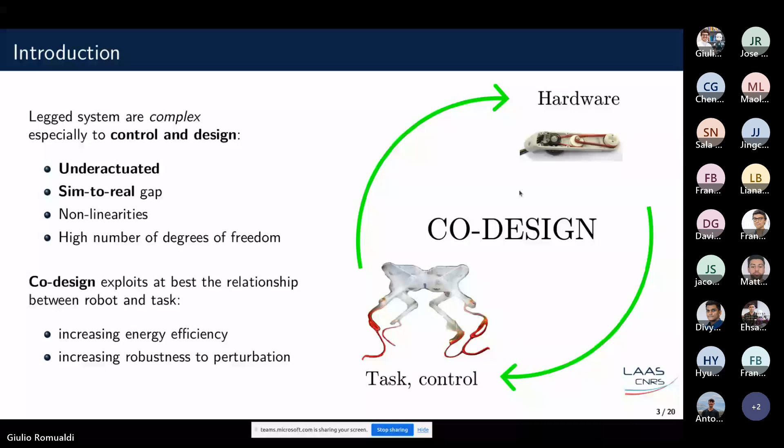What we see often in robots is that there are some waves of implementations that implement good designs. For instance, in the case of humanoids, we see that successful robots like Digit and Atlas have dynamics that allow for simple control. Digit is pretty close to a linear inverted pendulum model, presenting some other complexity, but more or less it's easy to stabilize with simplified models. Also in the case of Atlas, simple models work pretty well.

There are also some other trends pretty interesting in the frame of quadrupeds that have been developed and used extensively, coming from MIT Cheetah, showing how the proprioceptive design of the actuators simplifies control for achieving locomotion. This was first implemented with successful quadrupeds from MIT, from the work done by Kim and Patrick Wensing, and then has been ported to a lot of different platforms, one of which is Solo, which is the robot we have been working on and my research stemmed from.

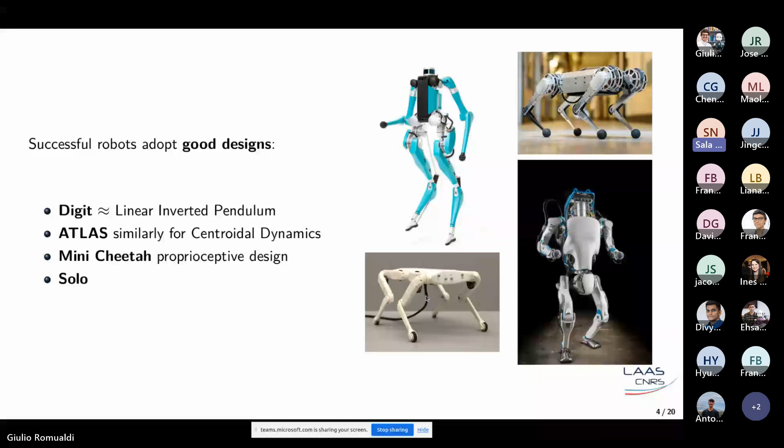So we see this pattern, which favors lightweight systems with concentrated inertia or high power density actuators.

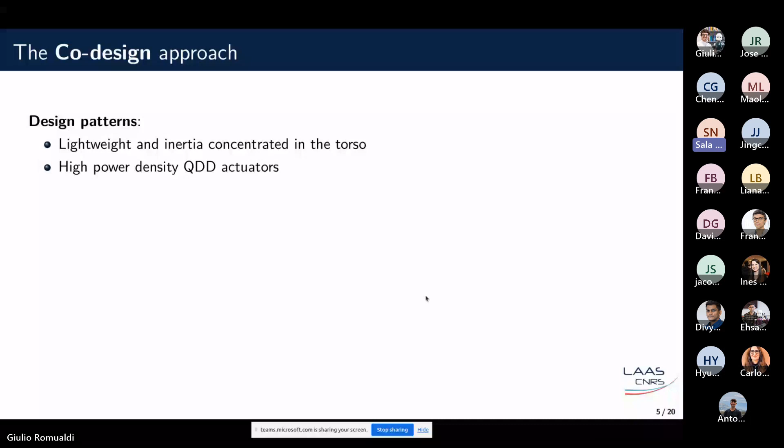But we also know that from the engineering point of view, the selection problem is very complicated because the design decision space has a lot of possible choices, even if you have to select some motors from off-the-shelf catalogs. There's a problem with complexity that is combinatorial, and moreover it's difficult to predict what the impact of the choice will be on the final design.

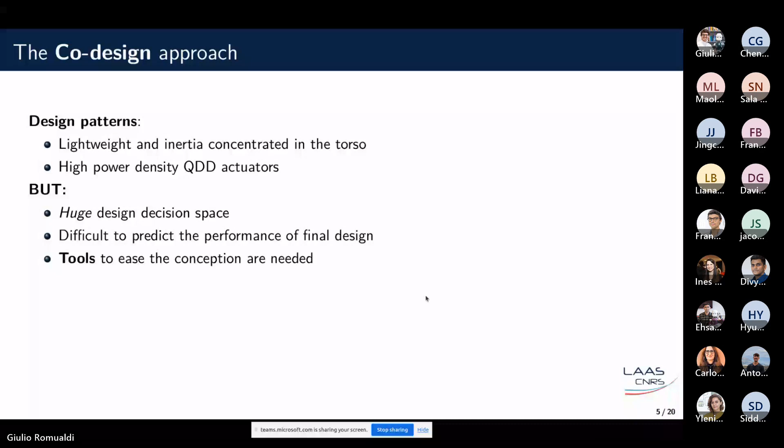So what we've been trying to work on is some tools or methods that can ease this conception and designing phase, that can be used maybe by system designers or roboticists. So we have some high-level idea about the task that a platform should do, but we really want to be sure that it will be the best version that can be deployed.

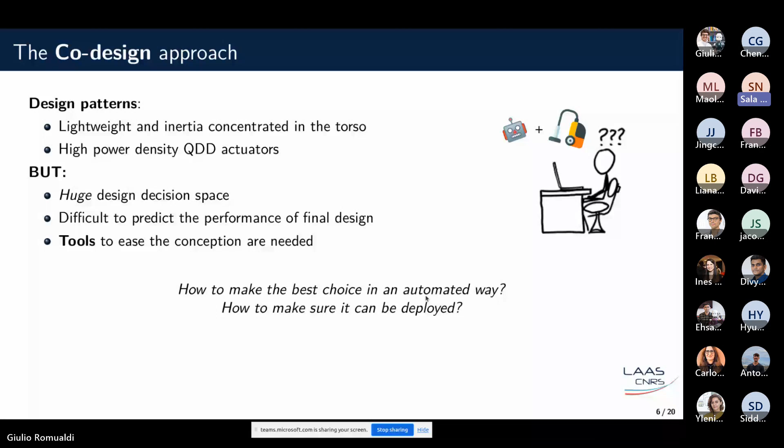And we can do this by using some nominal design, so what I would call a good idea, and then by exploiting some technologies that are already there: design, optimization, and simulation. These are workhorses for roboticists. This process has to be integrated in the same kind of framework.

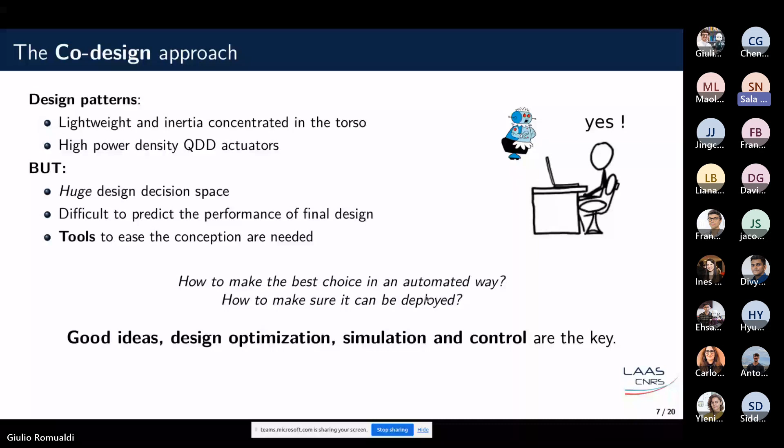Codesign by itself presents a pretty complex problem in which we are trying to minimize something, and the main way that we write this kind of problem, especially for robotic systems, is through an optimal control problem in which we specify some evolution, some dynamics, some high-level constraints on actuators, control, and state of the robot, and we try to minimize some metrics.

This problem of minimizing at the same time state, control, and design parameters, which I've been calling with this letter D, becomes a classical OCP problem in which we're just trying to optimize state and control once we fix some instance of design, so when the design related parameters are fixed.

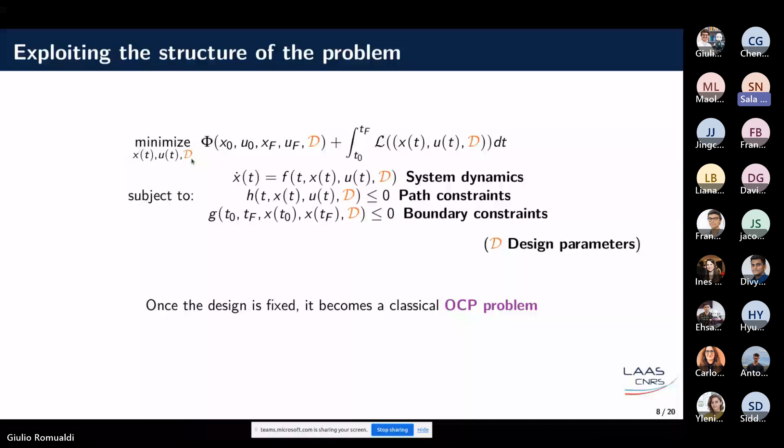By using this idea, what we've been exploiting is a bi-level approach in which there is an exploration phase for the design parameters and an optimization phase for the trajectory. With this in mind, the problem, which was pretty involved and required some specialized technique, can be solved with standard tools. It's automatically split into two parts.

One part mostly takes care of selection of the hardware, so the parameters that have been called design parameters, and the following task, which is just trying to optimize a given formulation that we have been proposing.

We're using two loops: what we call the outer loop, that is selecting the hardware through a genetic algorithm, and the inner loop, which is just minimizing the trajectories for a given robot model that is being drawn out of a population of initialized designs.

For each individual of this population from the genetic algorithm, after the trajectory optimization is done, we have as output the optimal trajectories and also the minimized cost, which in our case is mostly related to energy consumption. With this information, we can feed back the minimized cost to the genetic algorithm, and then the genetic algorithm can understand in a way what designs are performing better for the given task.

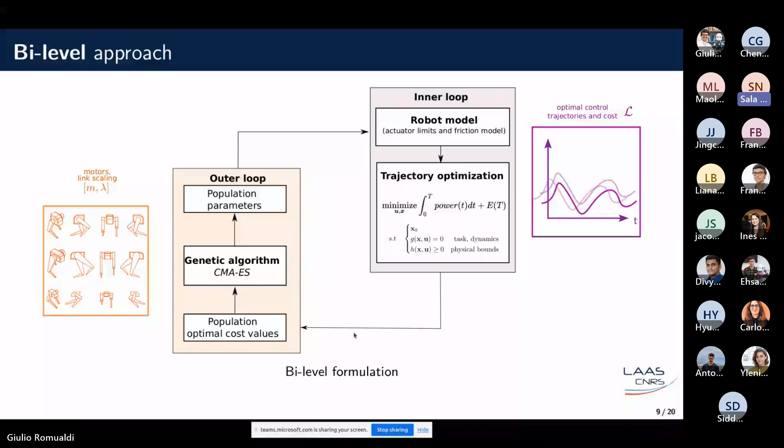So in this work, we've been working on open hardware from the Open Dynamic Robotic Initiative for a considerable amount of research. This is a project that has been carried on at NYU and Max Planck under Felix Grimminger and Ludovic Righetti.

The idea was to develop hardware of completely known characteristics for the researcher, so that the actuators and the characteristics of the structure are known.

Moreover, the idea is that the actuator blocks can easily be purposed for different robot topologies. Here I'm presenting the quadruped version of Solo, and the biped version that is called Bolt. But also some other variants are there, like it's possible to build some manipulator systems with the robots.

And the core of the work was to understand, since we have this accessible system that is pretty versatile in design and can be purposed freely, how to use the same hardware technology, same motor types, which in this case is from the drones, to make the robot more useful. So to understand how the scale of the robot was impacting the performance of the system, taking into account power efficiency. This was particularly important to have a model that estimates the consumption.

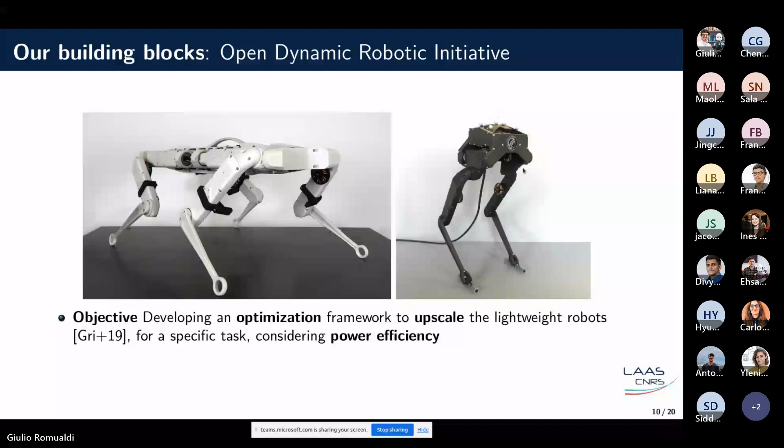So one main part of the work was to understand the actuator model, identify it, and determine how it's being modified by the selection of the motor and the transmission system. Here you see the open actuator model that is in Solo and some other robots. As you may see, it is simple. And the main idea that we had was to understand how the Coulomb friction coefficients are being modified by the selection of the motors and the transmission.

So in a first part, we worked on this side. Then another part that is related to the hardware is about the structural scaling, and there are a lot of different ways to modify the scale of a robot. What we suggested initially was to keep the material the same and also the same structure, but to tie the section scaling to the length, so that we can keep some kind of structural rigidity. It is important to have a structure that...

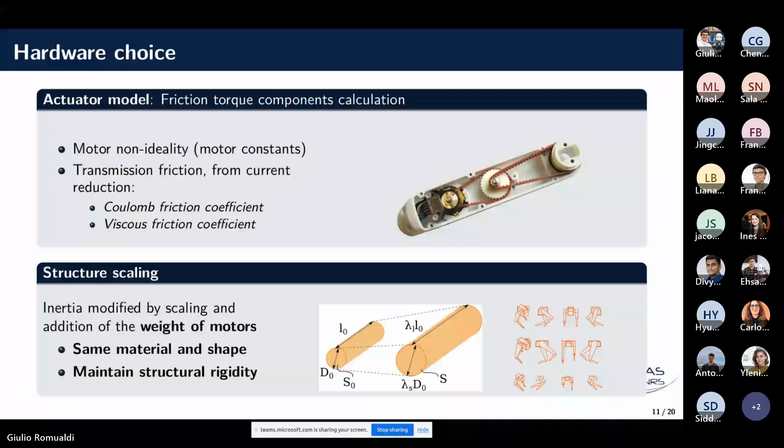...which may be problematic in the case of technologies like this, in terms of what concerns the energy efficiency. Once we found out how all the parameters related to friction were determined, and for the OCP, the main idea was that some kind of interaction with the environment, given basically by frictionless dynamics, we can reconstruct the power that the motor is acquiring, because this will also be related to the losses that we have in the transmission.

Basically, for producing this interaction torque at the joint level, knowing the transmission properties, we can reconstruct the total motor torque, including the friction component that is added. And with this idea, we can also understand how much torque and power is being lost at the joint level, and how much is being lost in the transmission as well, from an electromechanical point of view from the motor's point.

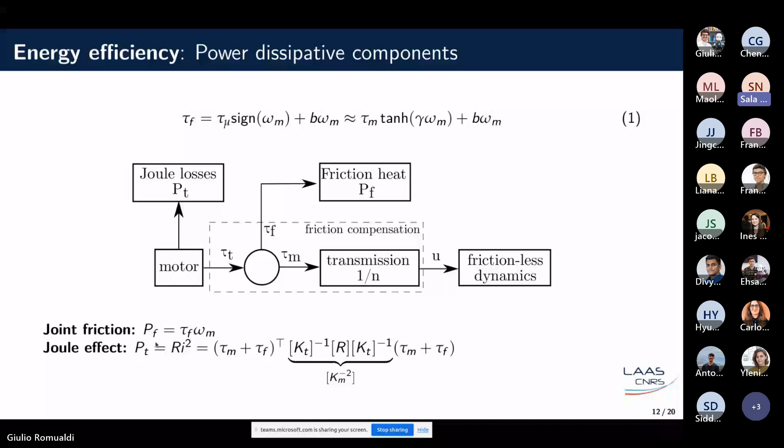So in terms of the overall variables I've been presenting, there is this size variable that is modifying the model inertia and length. In particular, we've been using Pinocchio for parts, so size is really impacting the robot model that is being fed into the OCP.

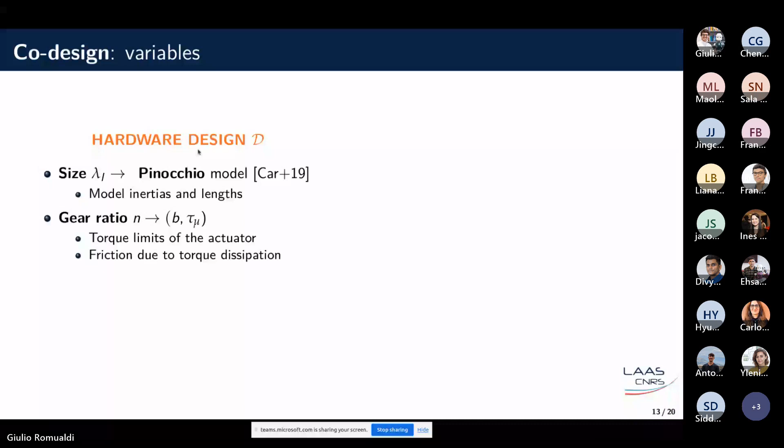Then another variable is related to the gear ratio. This is another variable from which we estimate the characteristics, the losses in identification of the actuator, so damping. This also impacts the torque limits of the actuator. So if we fix a motor and a given gear ratio, we also have a maximum joint torque that we can apply, and this is important to account for the limits of the OCP.

And then here it's related to another variable that is mainly related to the motor choice. Initially, since we knew all the information about the motors that are used, we made a simple regression from the set of motors we use that was enough to identify most of the properties of interest to us. That means the rotor inertia, the stall torque the motor can provide, the maximum angular velocity of the motor, and the motor constant for the Joule dissipation.

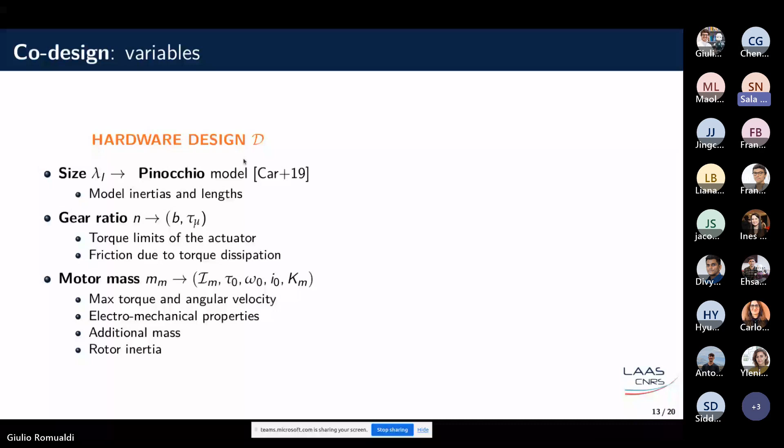From the control point of view, we've been focusing on optimal trajectories, so state and control, and we try to minimize the cost function. Additionally, other than the optimal trajectories, we've also been optimizing for robustness, using some controller-related parameter that allows us to scale up the Riccati gains from the DDP.

For the trajectory optimization with DDP, we use Crocoddyl, and one of the outputs of DDP is the optimal trajectory plus some gains that allow us to correct locally the trajectory with respect to a state perturbation.

So with this idea, if we have the optimal control U star and the state X star, and we want to follow the trajectory, with respect to the actual state and the state that we plan to be, we can utilize this simple linear feedback to stabilize the plan.

So the idea was to optimize with a scaling factor some variables related to the Riccati gains. It's still the greatest part done by the Riccati gains, but it's possible to add variables in the controller design.

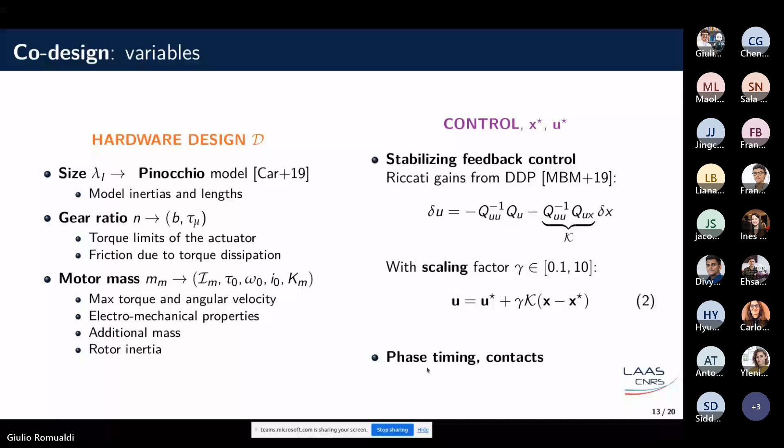In this optimization, we've been working on different kinds of hardware. In particular, some goals were first shown for a simplified version of the leg system, which is actually a leg that has an under-actuated base that can slide. This is a simple test bed that allows us to understand the effect of the contact dynamics and the energy efficiency of the actuator.

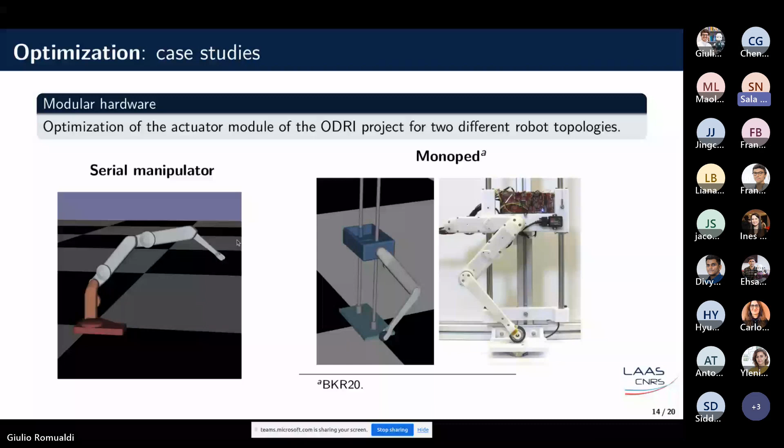Then for robustness, also some work was done for a serial manipulator with a similar structure. Then recently, we've also been working on a quadruped in collaboration with DFKI. And the quadruped itself was made using mjbots open-source platform.

The idea was to understand how, also in this case, the link shape, the link scaling, and selection of the motor is impacting the performance. And in this work, a major focus was on periodic tasks.

This motivated us to change also the optimization framework at a lower level, because in the previous version it was not possible to include high-level constraints from the initial state, which is important in the case of periodic tasks in which we want maybe just to translate forward by a given delta, with all of the other variables equal to the initial.

And from this, I can maybe show you. We were able to validate the power cost function model with this prototype implementation. That was also quite interesting, and it identified the model for the losses and how close those losses were to reality.

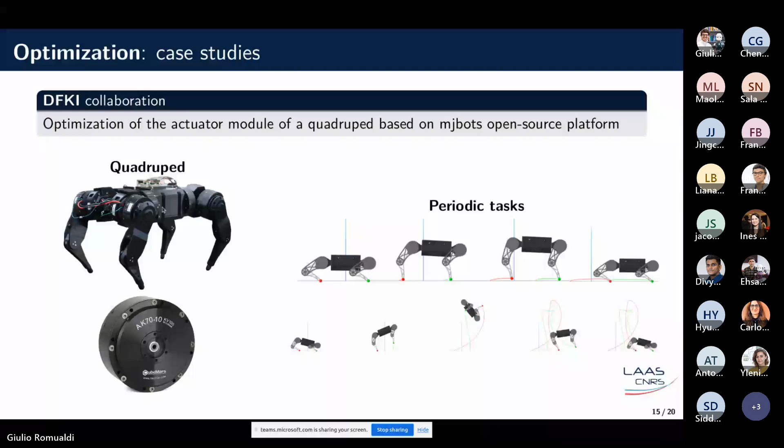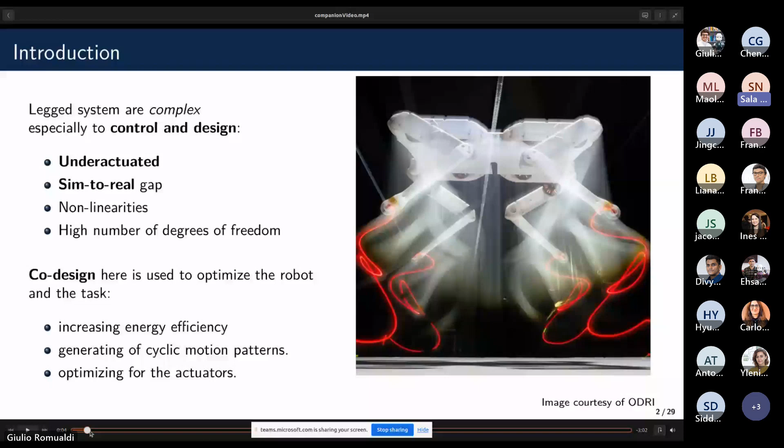So the idea was, as I was saying, to start with a simplified robot. The quadruped is different with respect to what we have on the Open Dynamic Robot Initiative, from the point of view of the mechanics and the materials. So we had to change some things.

The main idea was to optimize the platform with off-the-shelf motors. This was making the problem mixed integer, and we wanted to optimize also the scaling of the platform itself.

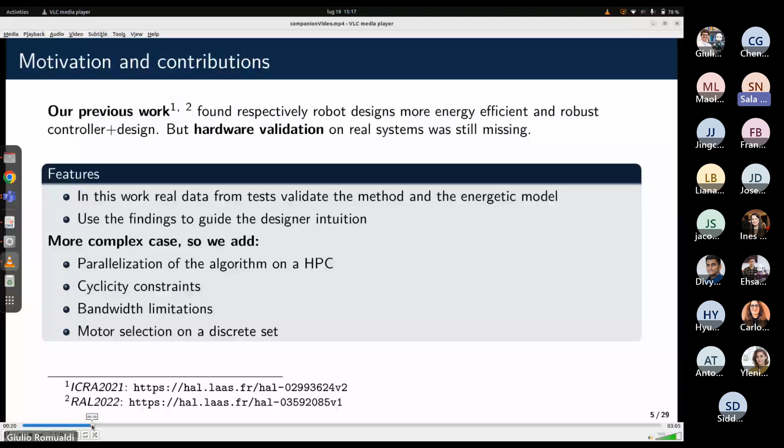Yes, and we also wanted to do that by taking into account the cyclicity of the constraints. The idea was to use the same kind of structure, just replacing for the trajectory optimization part Crocoddyl by CasADi, in tandem with solving the problems coming from the genetic optimizer with a computational cluster, really exploiting the possibility of parallelizing the problem.

And as in the things I've been showing before, what we really feed back to the outer loop is information about the power consumption of the platform. In this case, we can really enforce cyclicity constraints and additional tasks and dynamics related to this. This work was really more versatile in a way, because it could express a problem that was more rich.

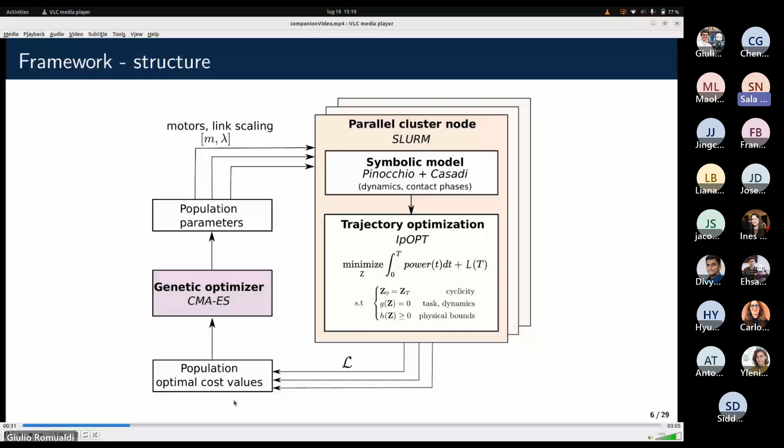We've been working on new things related to trying to cope with one of the problems of the standard OCP, which is related to the overall horizon that we can have in a cyclic trajectory.

We have an estimation of the performance really for the operation life of the quadruped. So the model itself was also simplified a bit, because we started from the 3D model and we used a simplified version, since what we were really interested to understand was also some kind of orthogonality in the motion, in the horizontal direction and the vertical one.

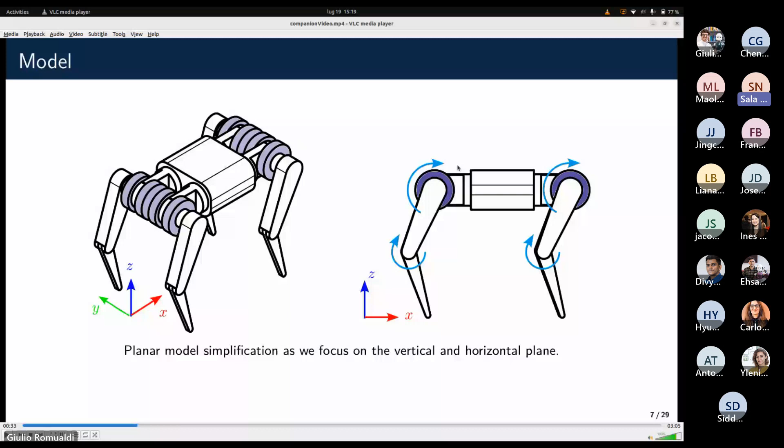Also, the two tasks that we wanted to optimize for were presenting this kind of orthogonality, given the fact that the quadruped has different planes. Here it's related to the OCP itself.

We have a whole body problem in which we optimize the state and the control, but also contact forces and acceleration, with some slack variables that we had to introduce in gamma, and there are additional constraints for cyclicity.

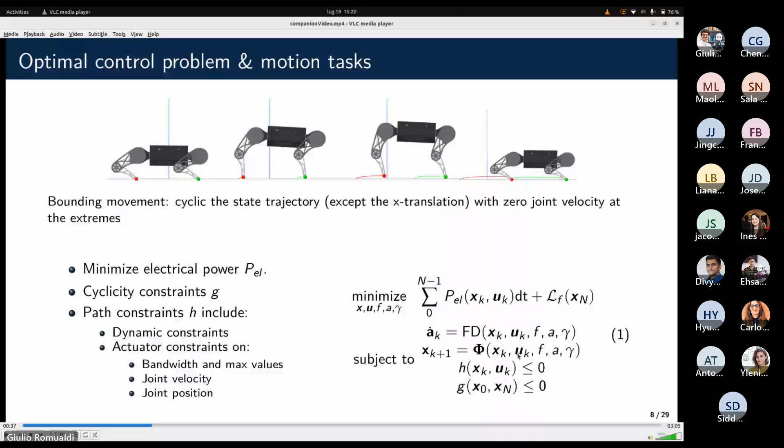In the cost function, the running cost is mainly the main contribution related to overall electrical power. In the case of the cyclic trajectories we're optimizing - a bounding gait, horizontal plane, and a backflip - we don't really need to add the mechanical energy because this depends on the state. With respect to the translation of the base, it won't change because we're starting the trajectory with the same kinetic and potential energy. So in this specific case, it was enough to have friction.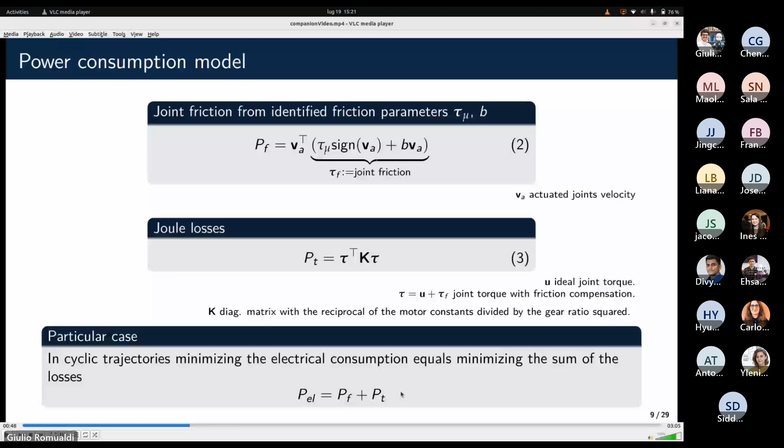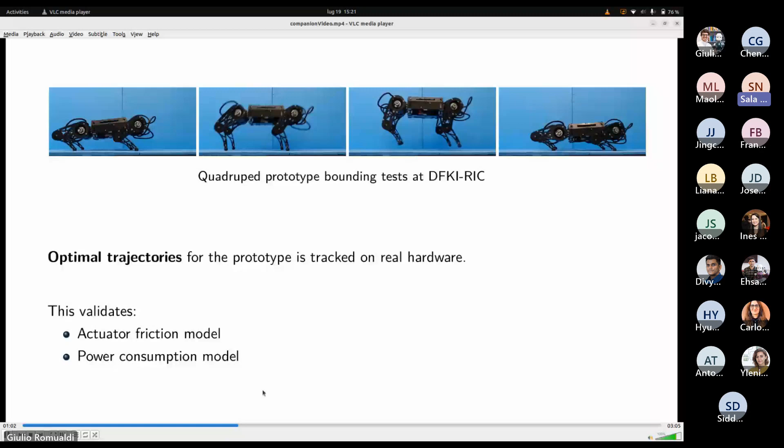So at first we optimized this kind of bounding motion of the quadruped, and then we were able to test it on real hardware to validate the actuator model and the power consumption model. Since we didn't have gains from the OCP, it's not a DDP anymore, so some tuning had to be done - there's a simple controller on joint position and velocity. Still, the results were pretty good from the identification point of view. We found that the torques were really close to the ideal ones.

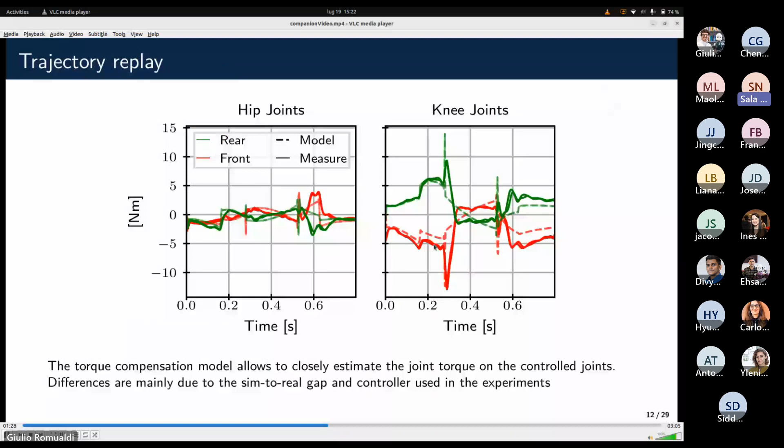For the initial part, we're feeding forward a term. The same applies to the electrical power consumed by the platform, probably mainly because we have mostly losses due to the Joule effect, and we have a good estimation. Here you can see the estimated values by the model, and the measured ones from the platform, just averaging over the given sampling time, the product of current times battery voltage.

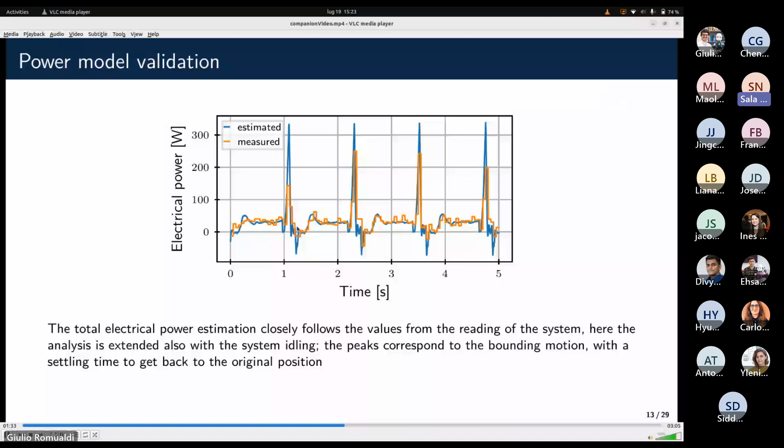Then we try to perform the optimization given this trajectory optimization problem. In this case, we focused on scaling the link and the discrete off-the-shelf motor selection. So once we have a motor selection, we're interested in the ratio that, as seen from the motor types, is already integrated in the structure, and the mass that we are adding to the system, because those motors are quite bulky - we cannot really neglect the mass - and the fact that we have a rotor inertia and some electromechanical properties that we have to use.

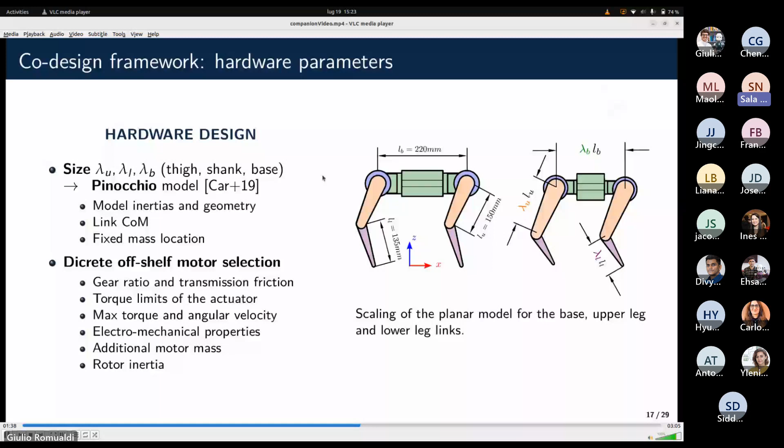So this is at least the model of the hardware, related to the actuators that we use. Then with this bounding motion, we perform the optimization, evaluating a large number of individuals. As you can see from the cost convergence seen by the outer loop, we reach some stationary values - it's here.

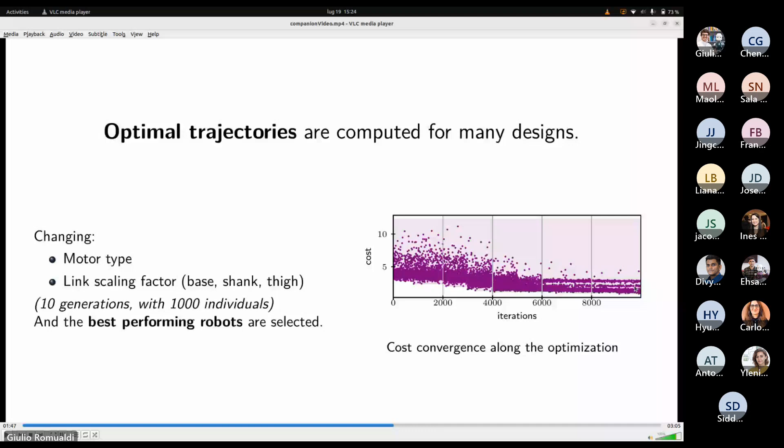In this case, it's just the optimization of the leg, the planar leg, so we had a total of four possible combinations. You can see these kinds of bands that are related, but more or less we reach some stationary values. We're really exploiting a large number of quadrupeds and optimizing everything, avoiding to express a priori knowledge about the trajectory, so the trajectories being explored are quite rich.

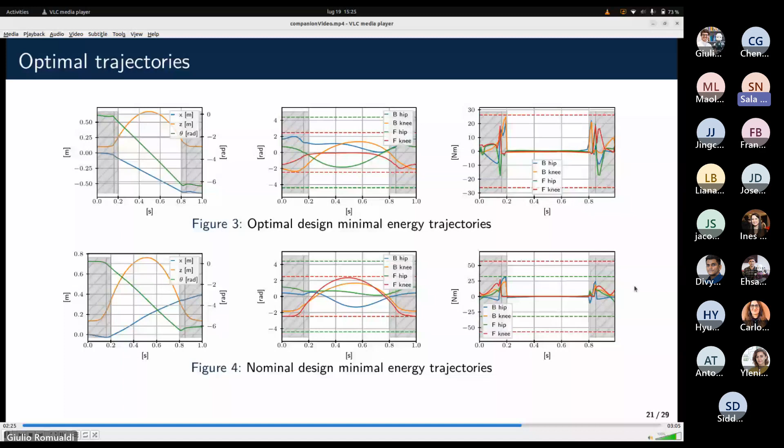Then an additional optimization was done just for the motion - nominal hardware, and then in Codesign. This is just the task that followed: dynamic motion on the vertical plane. Also in this case, we were able to find optimal hardware, and we found that the hardware optimized for the task was quite different. This was expected, because there is some kind of orthogonality between producing motion that has to go forward and motion that has to really exploit at best the angular momentum and effectiveness in the vertical direction.

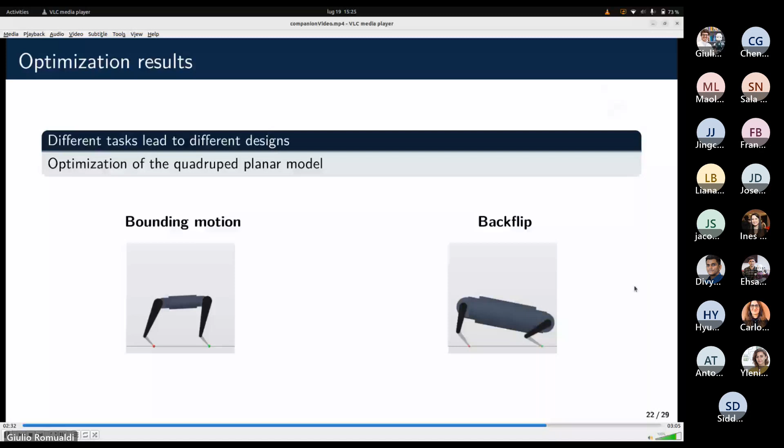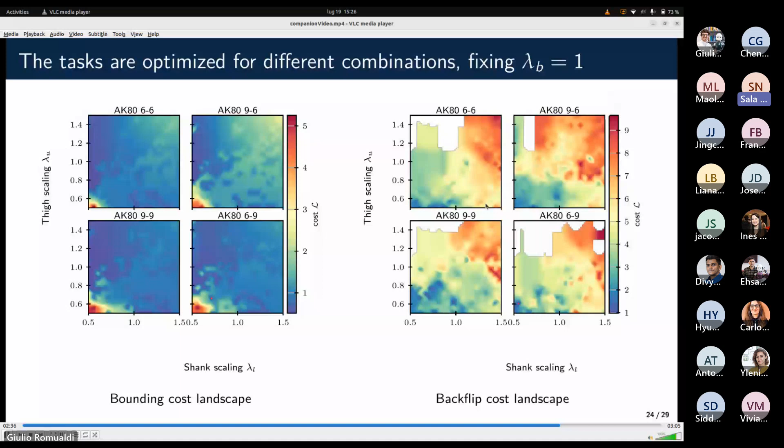So based on this, we also tried to understand what is the trade-off between the two. We explored, for the four different motor combinations, the landscape of electrical cost, and from these values extracted the Pareto front to motivate the design for the next step. Based on the landscape we did before and the nominal case, we selected...

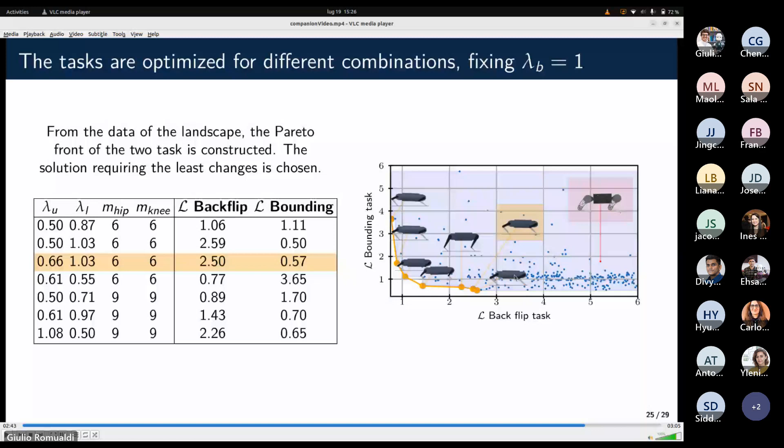So, as I would say, this Codesign approach is pretty versatile because we can optimize for a lot of different problems. In the latest version, it's more robust, and the evaluation of the cost can be parallelized. Then, on top of that, we were able also to optimize different tasks, extending a little bit the trade-off that we have on the hardware.

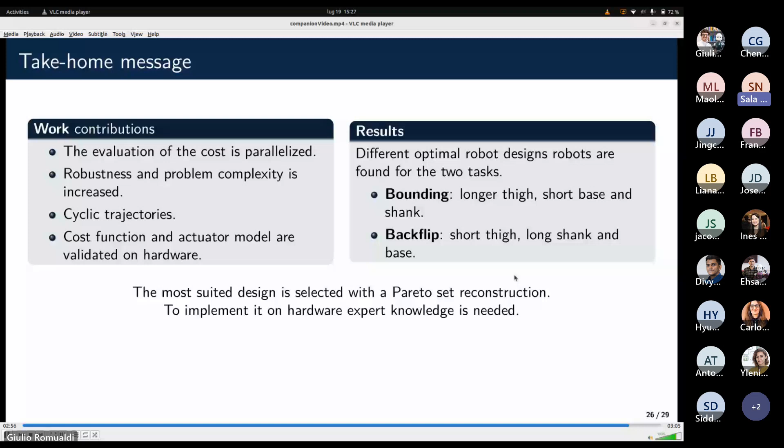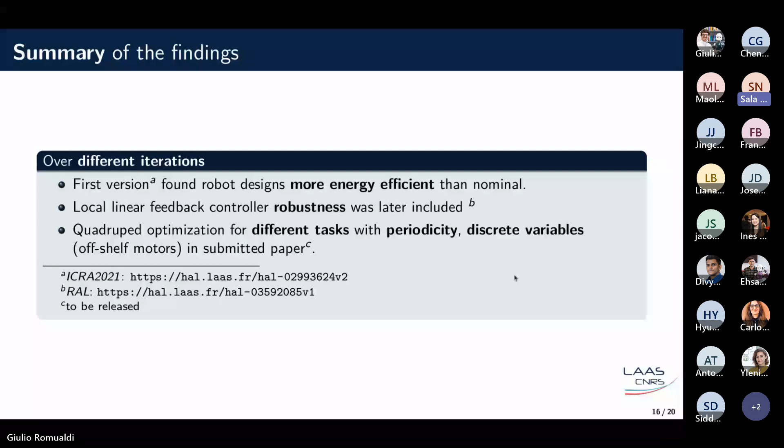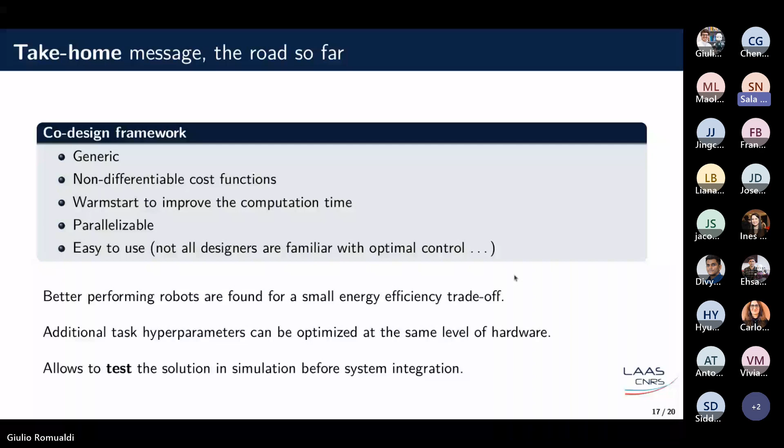In the latest work, as I would say, this framework can easily address problems, possibly with more tasks via parallelization. But there are some other aspects related to the application side, in particular the hardware itself.

In the projects I've been showing, the hardware comes from a nominal robot, from an open source project. Some kind of expert knowledge is involved there. It would be pretty interesting to understand how this step can be automatized, when possible, by robot generation.

Related to the generation of the behavior, solving the right OCP problem takes a lot of expertise. In some cases it's even pretty brittle and fragile, not robust enough to be applied to a lot of different problems. So I would wonder if it's possible to automatize this part to be more general, or to obtain more insight into the problem.

Right now, by itself, it's a tool that can be used for research. But it would also be interesting to see how it can be extended to other test cases.